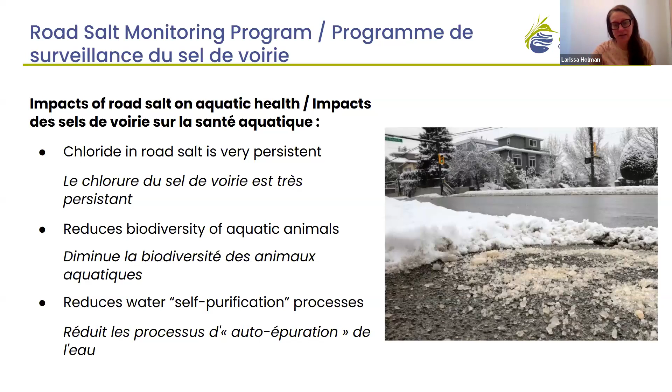From working with Milwaukee Waterkeeper, we learned how persistent road salt is, and also that it is not only a pollutant, but it has a fairly significant impact on biodiversity in smaller urban streams, often an area that is neglected in terms of biodiversity protection but still a key part of our watershed, and that it has ongoing impacts throughout the year. Knowing that road salt is something we apply ourselves and have some control over how much we use, we wanted to better understand what those health impacts look like for the city of Ottawa and Gatineau.

The objectives of our program were to assess the salt concentrations in our local streams and identify where there might be problematic areas. This is both within the city itself, but also, is there certain times of year that are worse? What does it look like after certain events? How can we learn more about this? And then, of course, share these findings with the public and hopefully also with decision makers, so that they can understand the consequences of oversalting and how that ends up in an urban aquatic ecosystem.

A little bit of the history of our program: we started this program in 2019. We had only 5 sites at that time and collected 80 samples. We continue to expand our road salt monitoring program and have included numerous different adaptations every year. This includes looking at rural areas compared to urban areas.

We developed a program where we strategically provided training for snow removal operators and contractors to try to influence those people who are applying the road salt and snow removal, and see if we could see a benefit to having training happening in specific locations in the city.

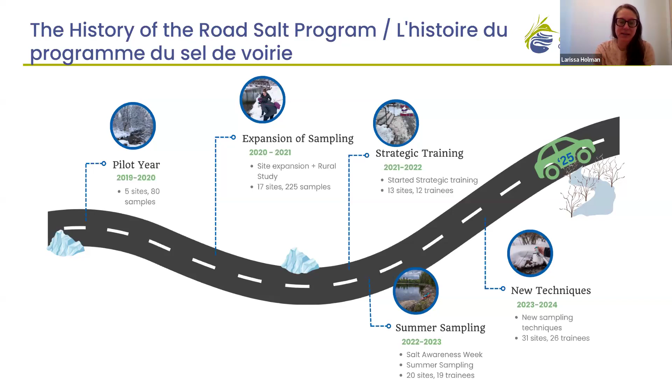Just to give a sense of what we're looking for when testing our samples: when road salt breaks down and turns into different materials, the toxicity associated with road salt has to do with the chloride present in the salt. Chloride is present typically regardless of the type of salt you're using, so you'll hear about different kinds of road salt and different makeups. It is the chloride that causes the toxicity, and it is the chloride that we're measuring.

For it to be safe for a freshwater aquatic system, chloride concentration has to be below a certain threshold, and that's 120 milligrams. As soon as it surpasses 120 milligrams, it's called chronic toxicity, which means a prolonged exposure to water with a concentration above 120, typically for 4 days or longer, will have lasting impacts on the organisms exposed.

Acute toxicity is over 640 milligrams per liter of chloride concentration, and this is for any organism exposed to this water. Some are more vulnerable than others, but the impact on those organisms is instantaneous. It doesn't need to be exposed for any length of time—just the fact of exposure is going to have an impact, often a lifelong impact.

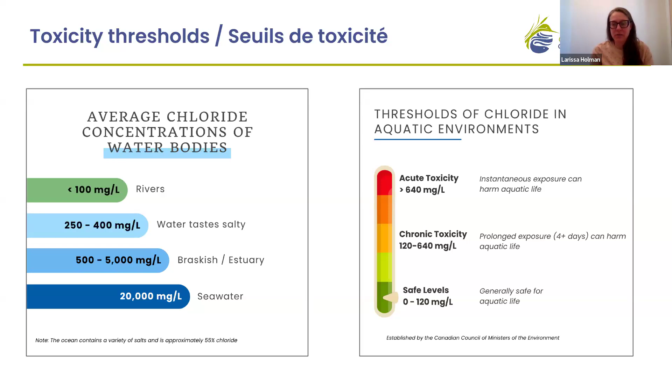Our work is based on the support of community scientists, and we wouldn't be able to share all of these amazing results without these individuals who go out and collect road salt samples throughout the winter, in cold weather after snowfall or rainfall events. We have grown this program through their remarkable dedication to understanding what's happening in their local streams, both through the number of individuals collecting samples and the number of samples and results we've been able to get.

We collect both conductivity and physical water samples to send to the lab, but now with the testing strips, we're able to test more often. Before, we were limited in the number of physical samples we could collect because of the cost associated with sending it to the lab.

Conductivity is also a great indicator of where the chloride concentrations lie, and it can really help us get a sense of how toxic the water is, even if we aren't able to send in a physical sample. This is just a sample of how well we've been doing in terms of growing the program and the number of locations we've been collecting samples from.

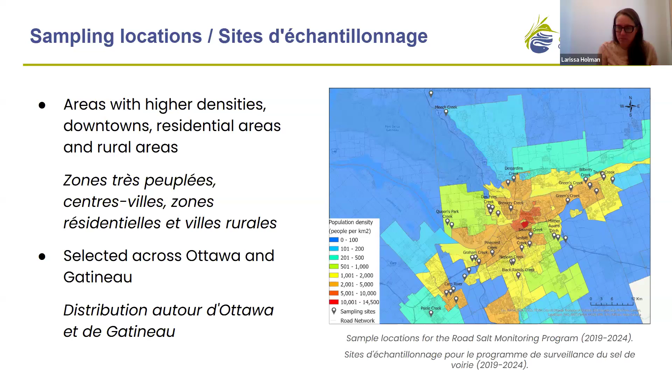When choosing an area, we have focused on areas with higher densities. We looked at downtown areas, and we also target residential areas. After the second year, we did target rural areas, but we've reduced those samples, seeing that there's just not the same chloride concentrations in rural areas. We aim to collect samples from across both Ottawa and Gatineau.

One thing that's remained consistent in our results is that the samples, when averaged throughout the year, show variation from year to year. Five years isn't enough to get a sense of the trend in road salt usage because weather changes so significantly year to year. But what we have seen is, regardless of what year the sampling happened in, the average chloride concentrations remain above that chronic toxicity threshold, indicating that most streams in the Ottawa-Gatineau area are being negatively impacted by road salt.

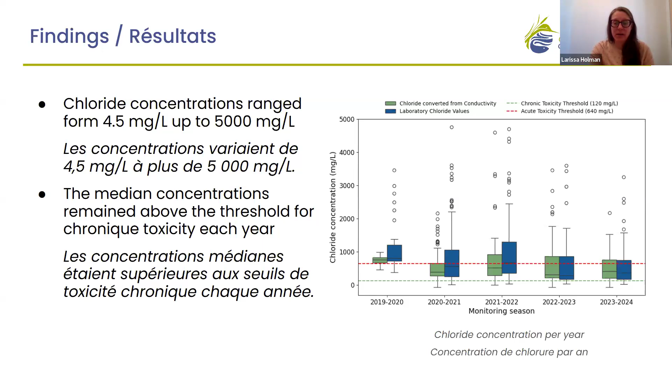We were also curious about what this meant over the years, so we started asking community scientists participating in this program to collect samples in the summer months. There were fewer samples collected during those months, but we still were able to collect some, and we found that January, February, and March are our highest concentrations of chloride in freshwater streams, but road salt was still present throughout summer, September, and even October.

There were still chloride concentrations above that chronic toxicity threshold, likely due to the persistence of road salt chloride in the natural environment. It doesn't break down—it really needs to be transported out of the system. When road salt is applied, it doesn't immediately arrive in the stream; often it gets held in the soils or plants. Over time, when there's a rainfall event and it's transported to the stream, we once again see that presence of road salt in our freshwater stream. So it has a year-round impact on aquatic health in urban areas.

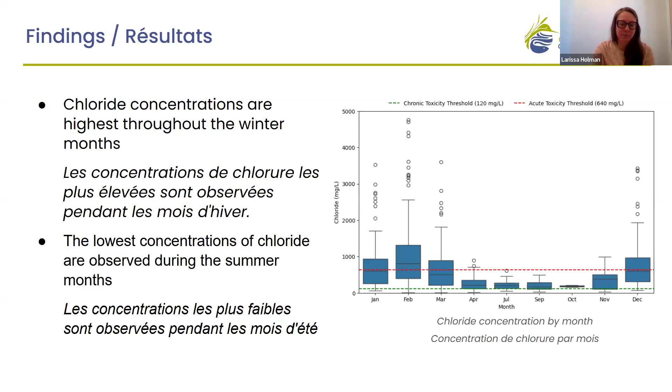Because we did this work in both Ottawa and Gatineau, we wanted to take a look at the difference between them, and we found that Ottawa has a higher average amount of chloride concentrations in urban streams. Gatineau is less so, but still quite high considering its impact on aquatic health.

There are a few different reasons for that. One is Ottawa is a much denser city, with a lot more hotspots for transportation and larger roads that could be located next to the streams where we're testing. But also the city of Gatineau tends to use less salt per kilometer than the city of Ottawa, based on calculations we did from publicly available information.

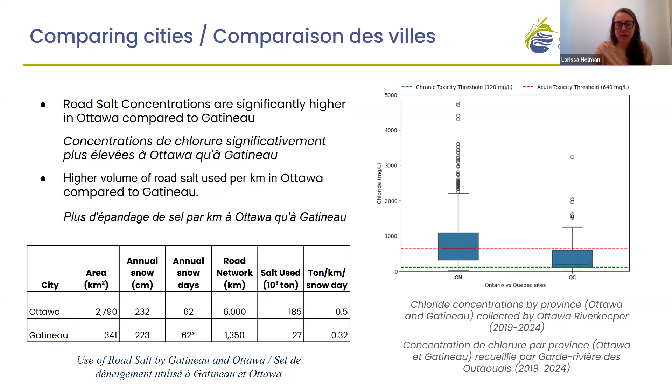With all of this information and results, we put together our 5-year report on road salt in the National Capital Area. It's available on our website, and you're more than welcome to download it and read through it. I think it's fascinating, but it has a lot more details about the program itself and where we've tested.

Through this work, we came up with four different recommendations. They're aimed at municipalities, large property owners, and individuals, because we all have a role to play in reducing road salt. What we see is that road salt application won't be solved by one individual making a change on their own property—it's a collective effort that will do the best work for protecting the urban streams.

One recommendation, very quickly: use available resources to ensure that road salt application is effective. There are some really great materials out there about when it's appropriate to use road salt, how to use it, how much to use, and for municipalities and larger property owners, that includes the mix of abrasives, temperatures, and all of that information.

We'd also love to see cities and larger property owners like the NCC develop and regularly update road salt management plans, so they're keeping abreast of what's happening technology-wise, have a long-term plan for updating equipment, and make sure they're using road salt as effectively as possible to reduce the amount they need to apply.

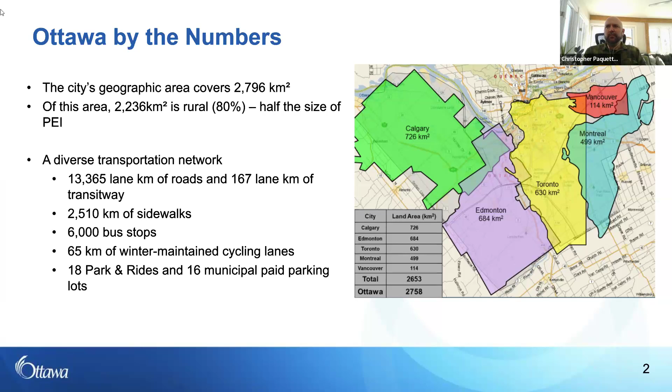There are three main activities that we perform in the winter: snow clearing, treating with material application, and snow removal. These activities are performed on our transportation network, which includes roadways, sidewalks, pathways, and the winter cycling network that I mentioned in the last slide.

It's important to understand these terms as we move forward in the presentation and throughout the winter season. Snow clearing refers to plowing and pushing the snow to the side of the road. Treating or material application is the use of salt, sand, or grit on our transportation network to treat or prevent icy conditions. Finally, snow removal is the process of removing those snow banks and encroachments as they begin on the transportation network. We actually just started ramping up our snow removal operations this week, right after Family Day, we're running 24/7 now to try and get those lanes back.

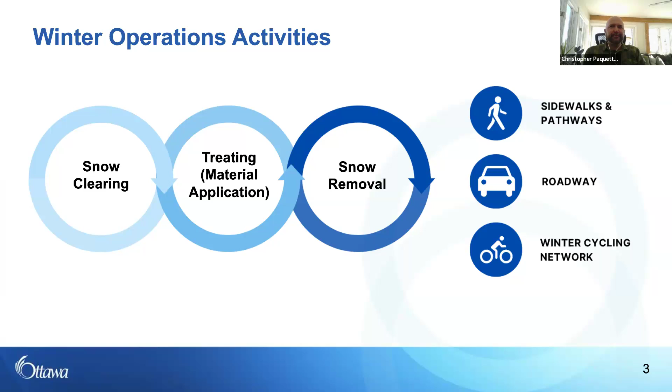So what guides our work? There are three main governing bodies that guide our work. We have the provincial minimum maintenance standards.

What this means is the province puts out a standard to municipalities that gives us a minimum level of service that we have to abide by. We have our municipal maintenance standards, or what we call our winter maintenance quality standards, which is a council-approved standard that supersedes the provincial standard. So our standard is actually elevated from what the province mandates us to do, where council has approved a standard which I'm going to get into here, and I think two more slides on what our standard actually is.

But that's what we prioritize our work around. And then our operational standards, which is our roads and parking internal guidelines and procedures. I'm going to share some of those today as well that interact with both the provincial and the municipal standards.

So, overarching, what to expect during a winter storm. I'm sure a lot of people have seen this graphic over the years. This is something we share quite often in our social media posts and on our website. I felt it was valuable to bring here to show that there are different levels of standards throughout the city and on different types of roadways and for different conditions. I can go through the slide one by one, but I think it's fairly self-explanatory.

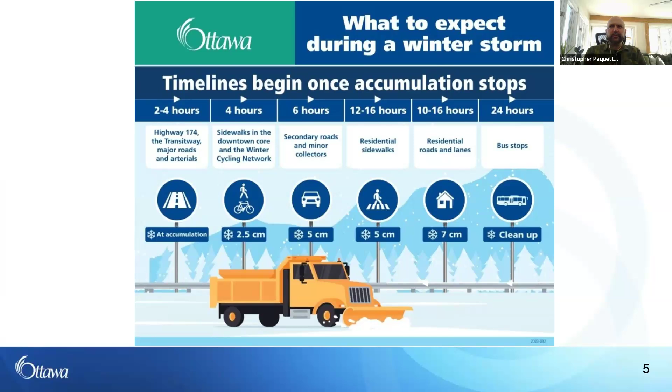A couple slides ago I mentioned the maintenance quality standards of the city. This is one page of our maintenance quality standard, and I wanted to focus on the roadway standard and how we deploy our resources. I'm not sure if you can see my cursor on the screen, but on the upper left-hand portion it tells you the road maintenance class, and across the top it goes by road type. The next two columns are quite important to understand.

This is the minimum depth of snow accumulation for the deployment of resources, and this is the depth as per the provincial standard, or that minimum maintenance standard put out by the province - that's the part in brackets. The part before the brackets is what the city standard is, and the provincial standard is in the brackets.

The next column over is the time to clear snow accumulation from the end of the snow accumulation, or time to treat icy conditions once we've become aware. Again, the city standard is in the columns below, and the provincial standard is the information in the brackets. The next important one is what the treatment standard is.

This is a standard that the city has to provide on these roadways at this classification. The best way I can describe this is a day similar to today, where it's sunny out, there's not many clouds in the air, it's a little windy, but we're not getting any accumulation and we're not on the tail end or the beginning of an event.

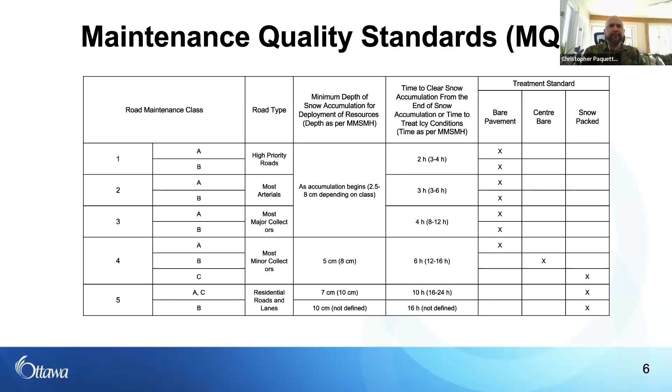So I'm going to get into our salt management plan in a little more detail. Our salt management plan is updated annually. It's part of a document that my team works on in great detail throughout the summer months.

Part of this plan is that we've actually bolstered our training for all of our supervisors, operators, and contractors. Years ago, about 6 years ago, we had a very cut and dry training program. Over the last 6 years, we've developed more and more in-depth training and identified all of the different parties that are involved in salt management or salt dispensing at the City of Ottawa.

We do specific training for all of our supervisors. They actually get a whole complement of training, whether it be weather, road condition training, or understanding how to read our weather stations and weather reports.

All of our operators that are dispensing any material undergo mandatory training, 4 hours every season. We go through all of the different nuances and equipment, housekeeping, and the actual application of the salt on the road. We do this exact same training with all of our contracted equipment and contracted employees. We train them as well.

Some of the key components of our salt management plan is our material application policy. In this policy, it covers items such as the maintenance quality standard that I showed in the previous slide. There's a lot of information about our material choices: salt, grit, sand, and winter liquids. And then our rates, which are based off of our pavement temperature and weather conditions.

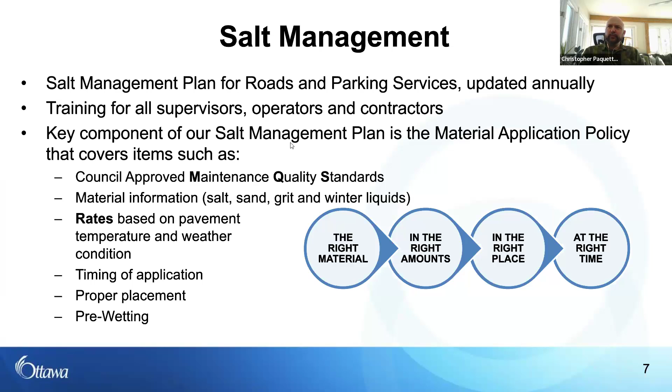We pulled this out because I felt it would be useful information in this presentation. This is a small snip of some training that we provide our operators. We actually have graphics for almost every single cross section of roadway.

You'll see in this, if you can see my cursor in the upper right-hand portion of the screen, the visual. All of our roadways are designed with a crown of some sort on them for water drainage and for the continuity of the asphalt on the road. We go over all of these in great deal with our operators. We talk to them about the importance of the placement of the salt.

When, if they're plowing a 2-lane road, the application has to happen on the road, as opposed to, if you'll see in this upper right portion, if you're applying salt on your pass number 1 and you're coming back to catch the other side of the lanes on your pass number 2, you're going to be plowing off a large portion of that salt. So a lot of this is done through our training, and we do spot check compliance through my group on operators and salting amounts from our initial dry runs that we do in the fall.

Another important piece of information that you're probably seeing in all these graphics is the ribbon stripping method. This is the application that's used by the City of Ottawa, and it is referenced in our salt management plan and in all the visuals that we train with our operators. The intent is for getting that salt onto the high portion of the road and getting the salt to interact with the moisture and the snow and the ice on the road to create that brine to bare off that road to that surface treatment standard that I talked about in the maintenance quality standards.

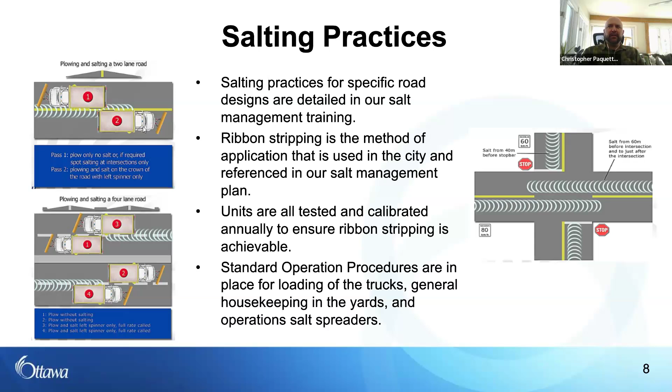We also have updated standard operating procedures in place for loading our trucks, general housekeeping in the yards, and the operation of the salt spreaders.

Next, I'm just going to talk about the 3 main materials that we use at the City of Ottawa for winter control. Number 1, and I know we're all here to talk about it, is rock salt or road salt. This is the most effective tool we use at this time to achieve our results on the scale in which the City of Ottawa is doing the maintenance on our roadway network. We use this material down to -18 surface temperature.

I could go down the technical hole here in great detail, but we look at surface temperature and ambient temperature very differently, and our operators and predominantly our supervisors are trained to understand what the difference is between those two temperatures and how to use the material and the right quantity of the material looking at that surface temperature.

Right now, we are using a mix of calcium chloride. So when you see, I have on the screen here, pre-wet salt - in our industry, what we do when we have certain conditions that allow those big trucks that I was talking about that you see go down the road, they have things called saddle tanks on them, and we carry about 900 liters of calcium chloride on board with those trucks. What we do with that calcium chloride is it allows us to get the melting power of the salt below -18 and allows us to use it even above -18, closer to 0 degrees Celsius.

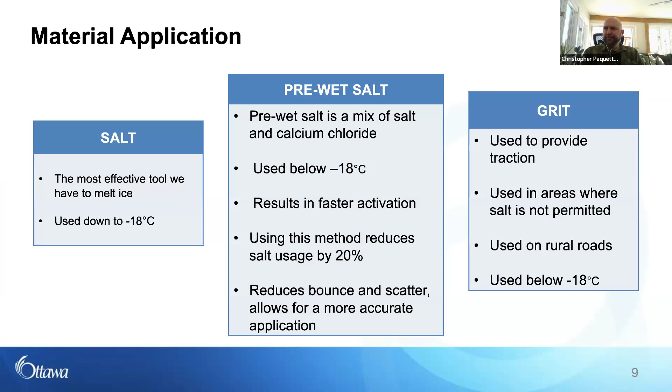So getting into how we make our decisions, and that last slide, that ability to look at that chart and send our trucks out.

We have contracted weather services that changes. This is an older slide from 2021, but we change the contract, I think every 3 years. So we have a 24-hour meteorologist on duty—I could call them right now and get an update. All of our supervisors have access to this meteorologist. It assists us in making decisions for upcoming weather events. If you're not comfortable with something coming in on the radar, we have an internal radar portal that comes with this weather service as well.

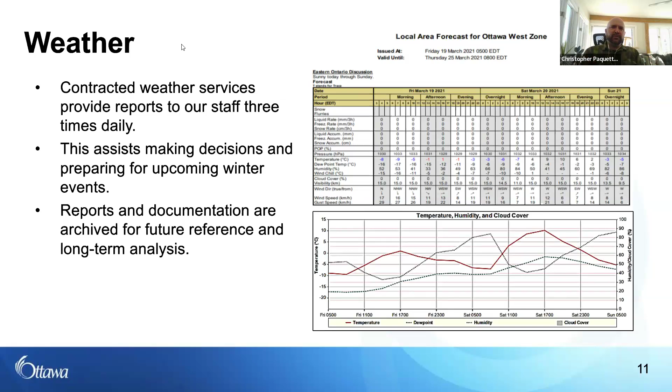The contracted weather providers come in and do training for all of our staff as part of our salt management plan every fall. That's another 4-hour training for the supervisors—it's a very interactive training, and we do scenario-based training with them so they're comfortable making decisions day to day.

In addition to that, this one I'm really excited about—I've been working on this for a few years. We've had road weather information systems at the city since the early 2000s, but in 2025, this spring, we're working through the final stages of what I've been calling taking these old flip phones that we have as RWIS stations and getting state-of-the-art smartphones. It's a very dumbed down analogy, but these are very, very important pieces of equipment for us.

They're strategically located across the city. We have 6 of them. We have subsurface probes down to 5 meters below the roadway surface—temperature probes and moisture probes—all the way up to the surface. We have cameras, accumulation meters, and this is all live data that we feed, for our supervisors, and we hold all this information for historical purposes as well.

Our equipment, I've touched on it as we've gone through the presentation. We use digital salt controllers in every single one of our heavy spreaders in the fleet. There's a couple of examples here on the screen. We predominantly run EPO Masters and Bosch equipment.

All of our units are monitored daily for salt usage and equipment performance, and calibration is performed by my team throughout the city. So if supervisors have an issue with a piece of equipment, or if we're flagging it in one of our reports, we go out and investigate that 24 hours a day.

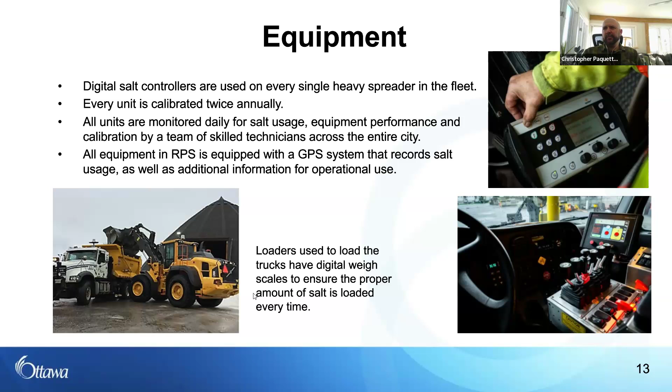New this season, something I've been part of for a long time, and I'm really proud to say the City of Ottawa, from my understanding, is the first municipality to do this in the world. We're deploying salt controllers on our sidewalk machines. In support of my director and our general manager last year, I proposed this project and got approval to run it on 3 units in the 2023-2024 season, and we got amazing results.

What we basically did is take the technology off the heavy spread trucks and install it in all of our sidewalk machines so we have much better control on them. The reason I can comfortably say we're the first municipality to do this is that we're actually developing this technology with 2 Canadian vendors and installing it on our equipment. We're really working together to make this a successful project.

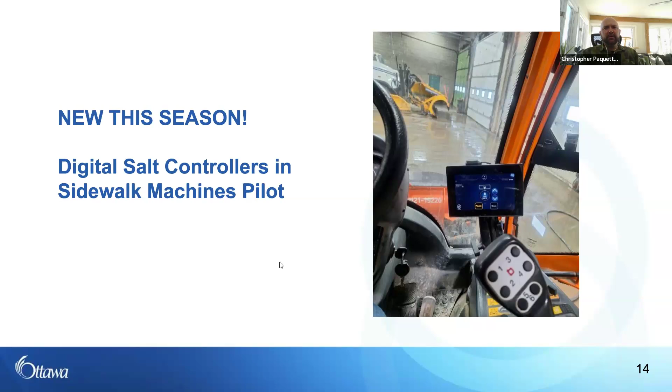So what we're hoping to do is get rates and a material application policy similar to what we have on our roadway spreaders, but for our sidewalk machine spreaders.

Some of the alternatives for treatment of icy conditions - I've been part of a lot of them. We have a roadway grader here, and we use specialized ice cutting blades on those to remove the ice without the use of salt. This is done regularly on our gravel road beats. When we get into the residentials, those class 5 A's, B's, and C's, and get a high level of hard pack, we deploy those resources to cut the ice into those beats instead of using salt.

And again, I mentioned the 90-10 mixture of sand and salt used on some of our roadway and sidewalk classifications, as per the maintenance quality standards.

Another project I was a big part of was the introduction of rubber-encapsulated carbide blades. We started this in conjunction with Fleet in 2021-2022, and we've seen fantastic success. We've seen success on multiple levels, including the ability to clean the roadways to a higher level, which means less salt. These blades also last a lot longer than the traditional blades we used before, so we're seeing a reduction in cost as well.

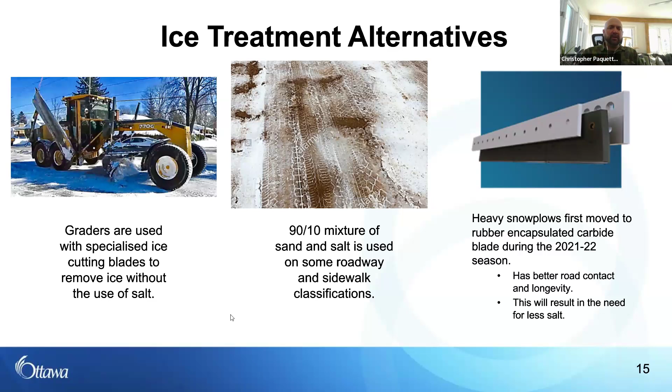Ongoing research into road salt alternatives is always happening. If something hits our desk or we see something new, we never turn a blind eye to it. We always put our best foot forward and try to reduce the amount of salt that we use.

We abide by the code of practice for the environmental management of salt published by Environment Canada, and we've adopted a lot of the salt management principles from that code of practice. We continue to pilot new and evolving technologies - we've done pre-treated salt, wood chips, beet juice. We even ran naturally occurring brine from fracking operations in Southern Ontario for a while. But for the scale of operations we operate under, we always rely on that rock salt and calcium chloride mix.

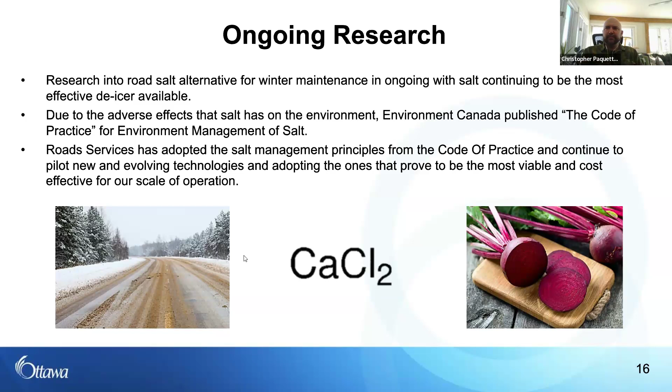Material management - I'm going to go through this really quick. I know we're running out of time here, and I'm trying to burn my way through this, but this is another project I was quite proud of.

That building in the picture is probably one of the best salt storage facilities in Eastern Ontario, completed this past fall in 2024. It's in the west end of the city, an extremely sensitive area. This was four years in the making, and myself and a large portion of my team were in charge of it.

Everything happens inside this site - not a grain of salt is loaded or unloaded outside of this facility. It's quite large, 80 feet wide and 140 feet long. All of the operations take place inside a covered building, outside of the elements, with zero implications to the environment.

And I think that's what I had for today.

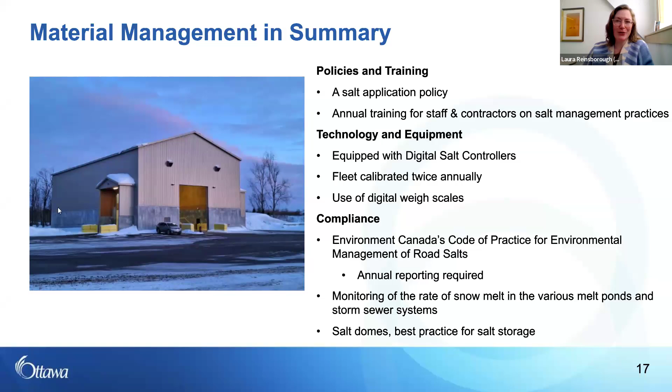Excellent, well Chris, thank you so much. Chris Paquette from the City of Ottawa has shared about the work the city is doing to manage its application of road salt. I really appreciate the transparency in sharing your road salt management plan details with us today, and the steps you're taking, the ongoing research, as well as what you shared at the outset about the surface area the City of Ottawa comprises, which is huge for a municipality - not only the largest within the Ottawa River watershed, but also the most populous. So the impact is significant, and we really appreciate the strategies, techniques, equipment and technology, all the different approaches you're taking to more effectively use road salt as one tool in the toolbox.